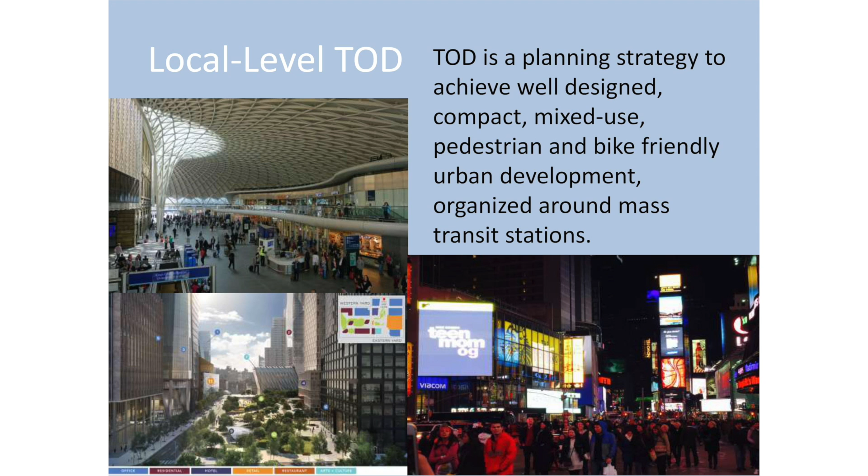This is nice, and I think you can have a nice impact on your community by doing so. But let's go one step further. Let's imagine a city where actually the city is more competitive, where you can access jobs and services easily without requiring a car, where you can move around quite easily. Let's imagine a place where you have a lot of high-quality neighborhoods, where the cost of infrastructure is actually lower per unit of GDP, and the CO2 is actually lower, where you can identify those parts of high concentration and make sure that they are resilient to natural hazard. And lastly, because it's important not only for the Ministry of Finance but for city officials, where part of it can be funded through value capture.

Now, the good news is that a lot of cities have achieved that. When you look at it, you have cities like New York that concentrate 60% of their office space on 1% of their territory, creating a lot of agglomeration benefits. You have cities like Hong Kong, where 83% of the jobs are within 1 kilometer of mass transit. Or in the US, a recent study showed that the cost spent on transport plus housing for people living near TOD is only 37% of income, compared to 51% for those who are not near TOD.

In terms of creating high-quality neighborhoods, I think there are a lot of examples. I'm thinking about Hudson Yards, which is under development, King's Cross, but also a lot of developments that show you can create a dynamic environment with a lot of public space and green areas. But more importantly maybe, you can do that in a way that does not translate into higher emissions or higher energy consumption, even though your GDP goes up.

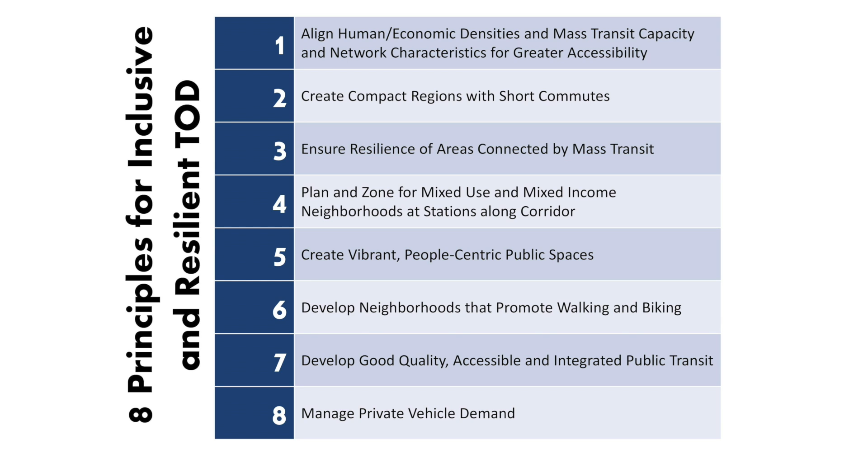Now, I shared with you on each table those principles, and those are something that I'm now going to explore looking at different scales of a city.

First, the metropolitan city level scales. When you look at a city, the cities that have evolved using TOD principle for decades, you find cities like Hong Kong, where currently about 83% of jobs are within a kilometer of metro station. But also residence is at 75% from mass transit stations. The same is similar in places like New York or London.

But coming to Singapore, what is important is that you can, as a city, set a vision that aspires to improve that balance. In Singapore, when you say that you want by 2030 to have 8 out of 10 households living within 10 minutes walk from a train station, it means that your urban planners and transport planners have to work towards that objective.

So alignment, or bringing the population close to the mass transit, is the first solution. The second one relates to the way cities mature and transform.

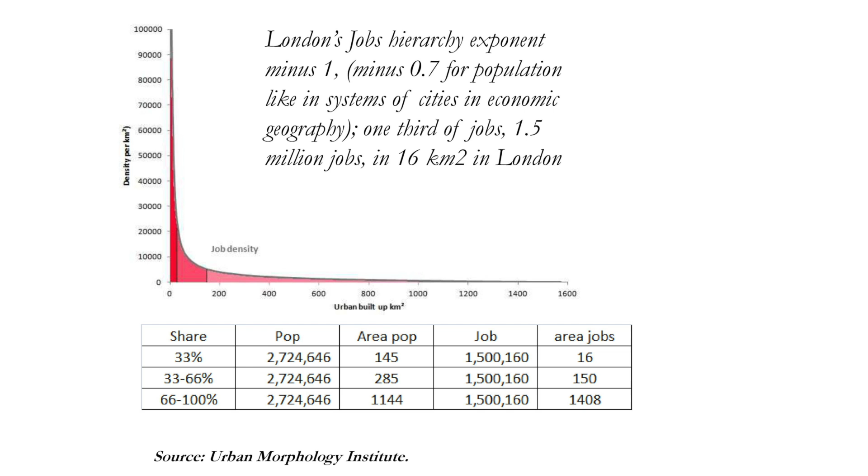Now, when you look at the way mature subway systems emerge, you find that they tend to converge toward a very dense core, as shown on this graph, with a number of extensions towards the suburb areas. Within that network, a number of stations play different roles. Some are better connected than others. Some are more in the middle of different paths than others. Some are closer to other stations than others. And because of these unique network characteristics, similar to what you'd find in a computer network...

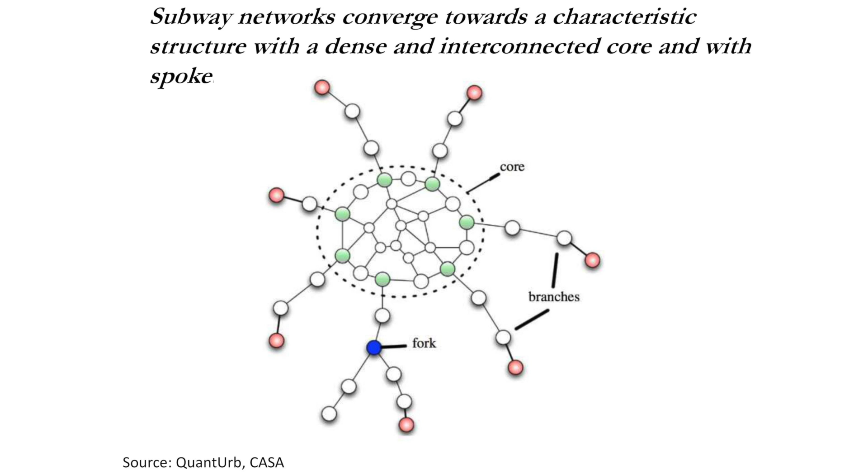You will find a number of centralities within the network, which can be used to show what are the centralities within the network, then to compare those with urban population density centralities, and see how you can gradually align for that.

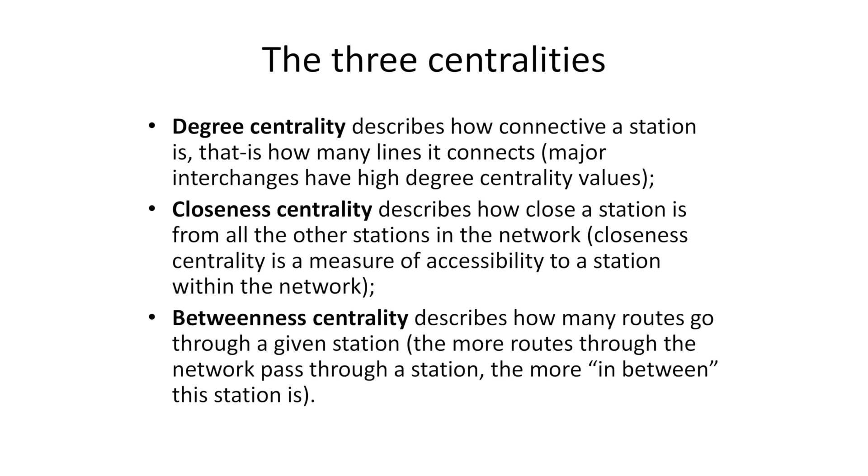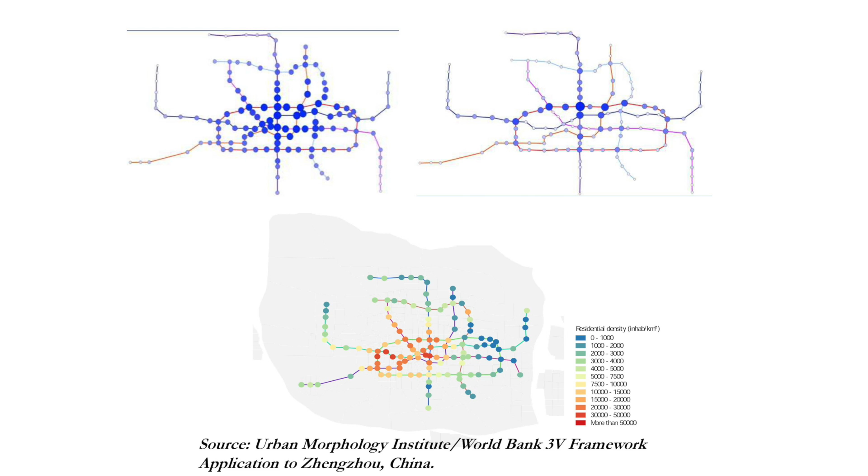Now, you can imagine that in a network of this size, you are going to have very different stations, very different opportunities. So there's a need for a typology that identifies both the scale, the type of development, but also its timing. Some of it may be needed today, some in 20 years, but you need to plan and prepare for that. You need to be able to allocate limited public resources to those that create the most value, and to communicate with private developers where you would like to see development take place. We'll learn more from the Marina Bay case later on, how developers are prompted towards a certain direction.

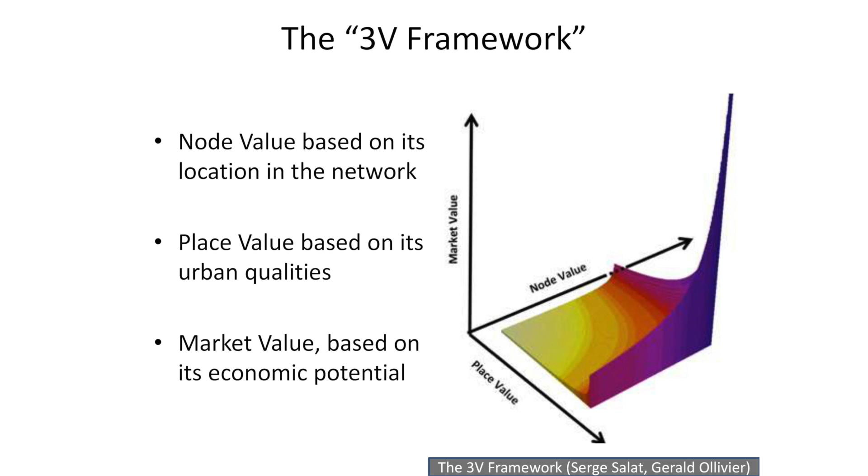We developed a framework with Serge called the 3-value framework that looks at the node value, the place value, and the market value of stations, and attributes to that a certain opportunity value to maximize the economic efficiency. We have a report in the back, also available on our website for further discussion.

Now, having done that, you can locate the transit-oriented areas within your city. You can decide how to concentrate densities, which will be your primary center, secondary center, tertiary centers, and apply accordingly a set of differentiated floor area ratio increases around those stations. I mean that because in some countries I've worked with, there's a statement that if you're next to a subway station, it's going to increase to 4, regardless of the significance of that station in the network.

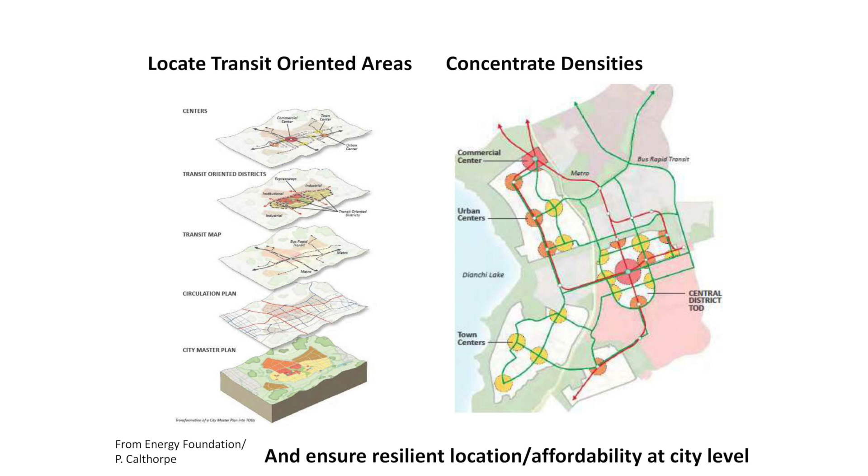Moving to the second scale, the corridor level. The corridor level is typically what we as transport people get approached for - oh, we want to build a metro or a BRT, how do we do that? And actually, this is where the conversation on integration between land use and transport needs to take place. So what we look at is how do you maximize the accessibility impact on one side, while ensuring a better integration with the surrounding and a balanced mixed use along the corridor.

So the integration in terms of economic integration, public transport, biking, walking networks, the green networks of parks and the cultural heritage within the city, but also an opportunity at a smaller scale than the full city to see what it takes to make it happen on a significant but not so overwhelming part of the city. So developing a set of TOD projects, ensuring that they are going to be resilient and trying to create a balance in terms of job housing balance along the line.

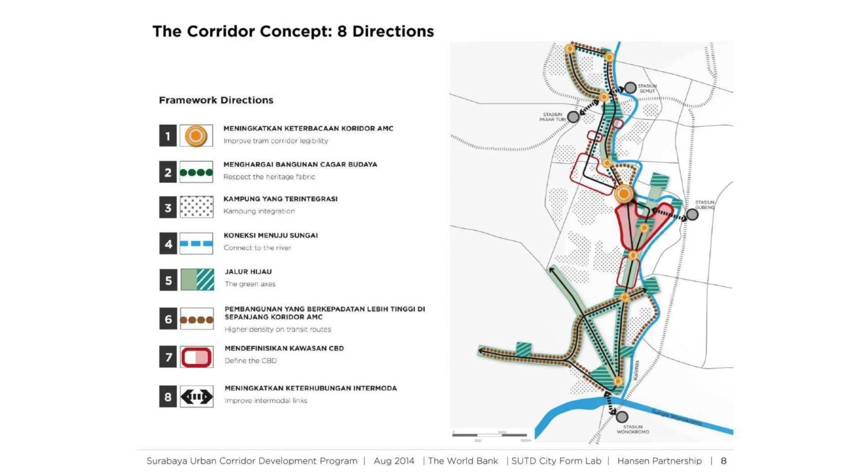In one of the projects we had, which we studied in Surabaya, looking at the corridor showed opportunity to connect some of the historical sites, some of the older types of neighborhood, connect the corridor to the river, redefine and re-intensify the development of a CBD. Doing that type of work allowed a better understanding of a fit between a transit function and an urban function in a way that brings the integrated approach mentioned earlier.

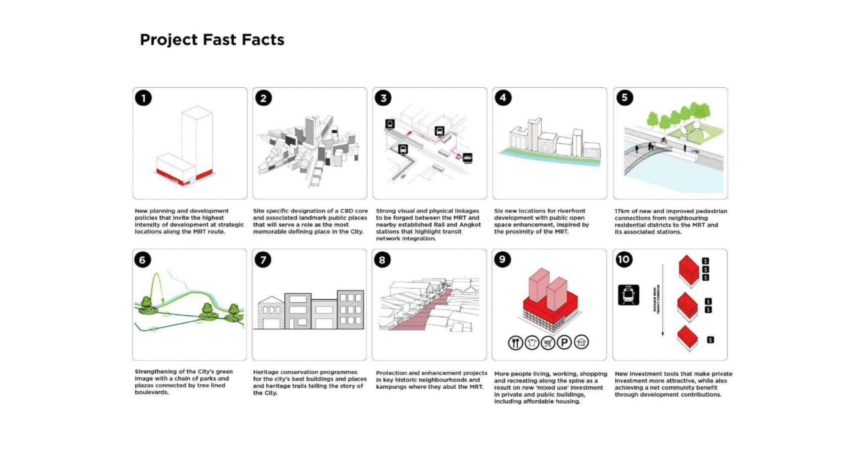We can also, through this kind of analysis, define how along a corridor, different stations offer different opportunity. And you can start estimating what is the impact in terms of job accessibility with or without TOD.

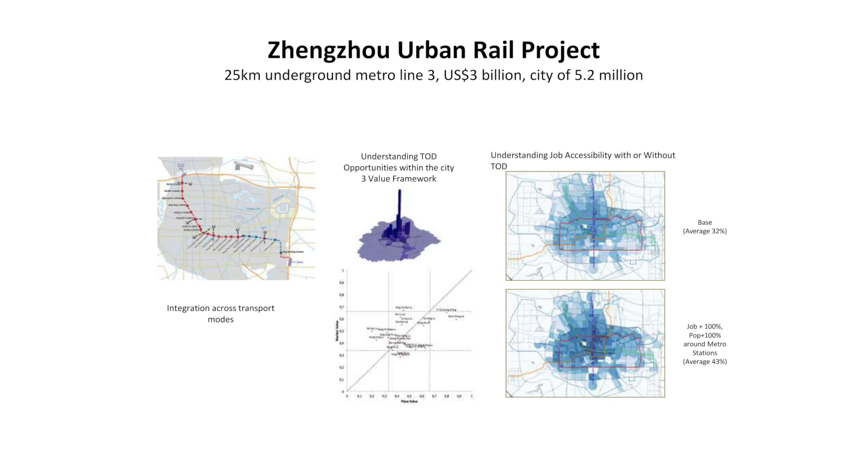Now, moving to the station level, the core principles are relatively well known and not that complicated. You want to enlarge the walkability around the station, make it easy to access regardless of the surroundings. Make sure you have temperate and comfortable conditions. In a country like Singapore, that's why you need to cover some of the pathways to make it more agreeable to people. You need to promote biking wherever possible, both at the road level, but more essentially at the intersection level. You need a supportive street network that is not overwhelming, like avoiding a very large super block that makes it difficult to move forward.

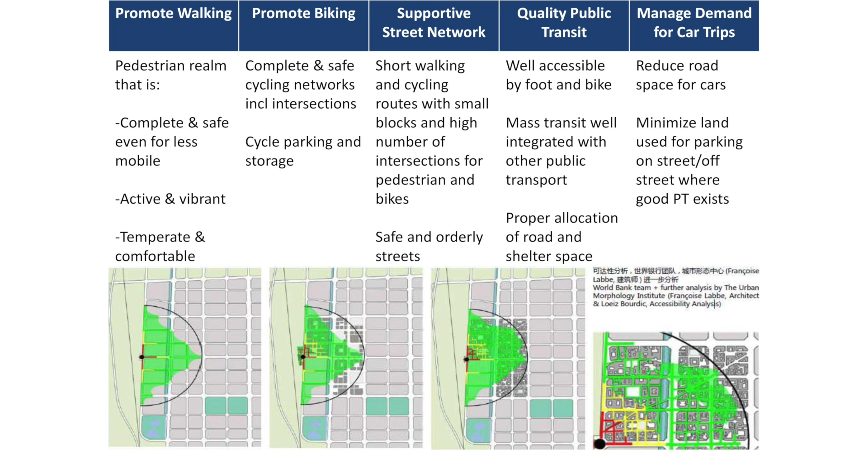You need to support a well-integrated quality public transit, which means integrating the public transit with other modes of transport, and providing proper road allocation and shelter space for this public transit to operate well. Equally important, as learned from Singapore, you need to think about how you manage the demand for car trips. That's the other side of TOD - you need to make sure people have a disincentive to use their car.

With that, you can focus on creating vibrant, people-centric public space and plan and zone for mixed use. That means ensuring higher densities close to the transit station and diversity of land use around the metro station, while considering the needs for supporting infrastructure around the station, because more density will require more infrastructure. That will create much more value than it costs, but still it needs to be integrated.

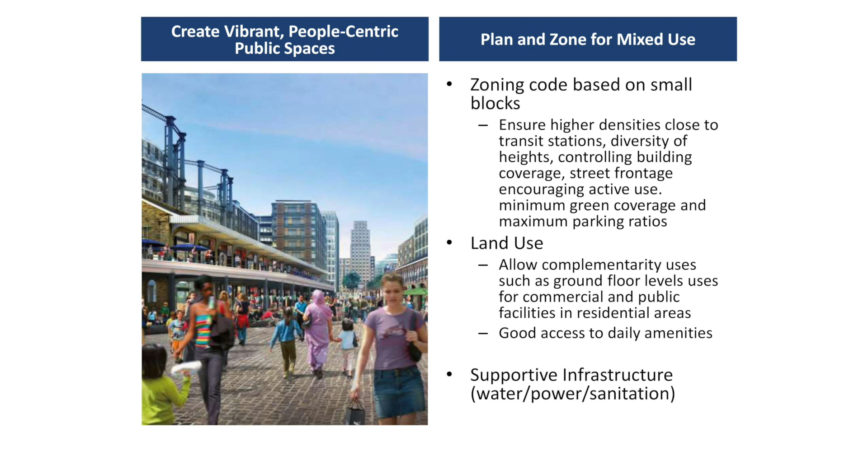So looking at a specific station - here my colleagues from China will be happy, it's all in Chinese - you will see how you look at the station and then decompose around a radius all the issues that need to be addressed for that station to work as per the original intent.

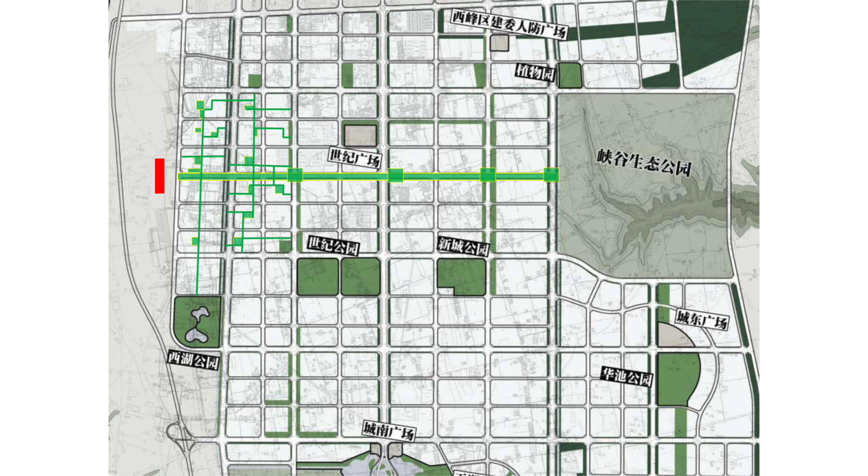Examples of quality environment for pedestrians, which are becoming more and more looked after by cities like Tianjin, where we work, for example. Connecting a TOD area, which in this case is a railway station, to the network of parks in the city, so that you create a high quality environment.

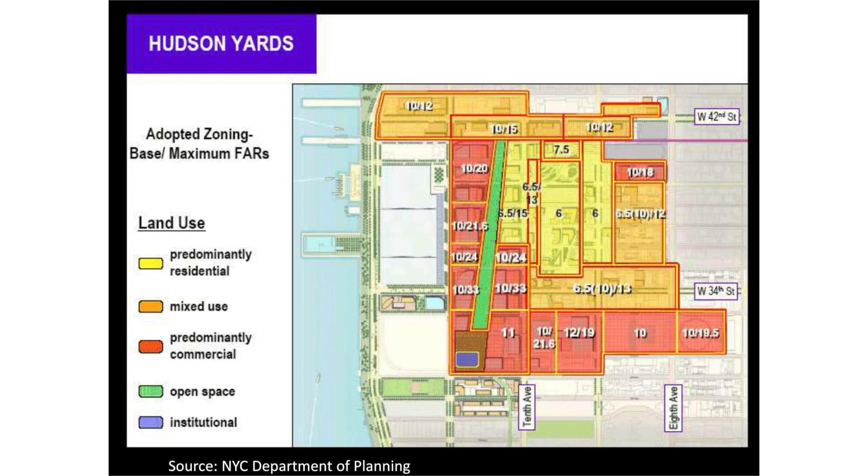Or like in Hudson Yards, create a diversified set of densities that will allow the mixed use to take place, with sometimes densities that are very elevated, like 33 in this case, so much more than the base case of 10, because developers are willing to pay for additional densities in exchange for providing the proper urban space and public space required, against inclusionary housing bonus for example, that allows this goal of inclusive TOD to take place.

Now, I'm running a couple of minutes late, but let me conclude that TOD can be looked at 3 scales: the metropolitan, the corridor, and the local. In the past, people have tended to focus on a TOD development which is a single location, but for you, with your fast-growing cities, the opportunity is to elevate that.

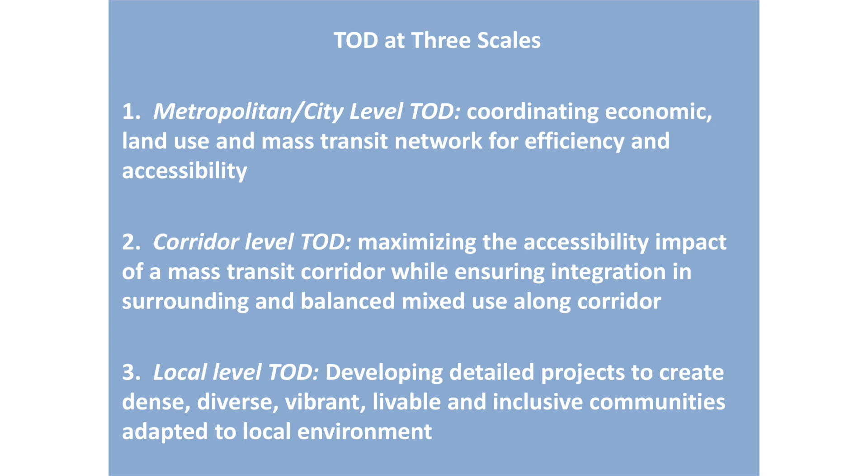Let's not forget, nonetheless, that it's a process that takes time. Even the best countries may take 10, 15, 20 years to develop completely a TOD site. It requires a fairly strong level of institutional capacity with transparent rules, good regulation, design guidelines. It needs to consider the notion of social inclusion, not necessarily at each site, but at a network level, at a corridor level, so that you create that opportunity for access to jobs and the like. The lesson learned is that there is clearly a role for the public and a role for the private sector to be looked at.

So with this, I will conclude, and we are going to now move to some very concrete examples. We have the opportunity today to have a full range of planners, transport and urban planners, architects. Our first presentation is going to be from a city where we are actually supporting a metro development, a city that has been very progressive in terms of TOD. So let me invite Mr. Yua to the podium to present the experience of Nanchang.